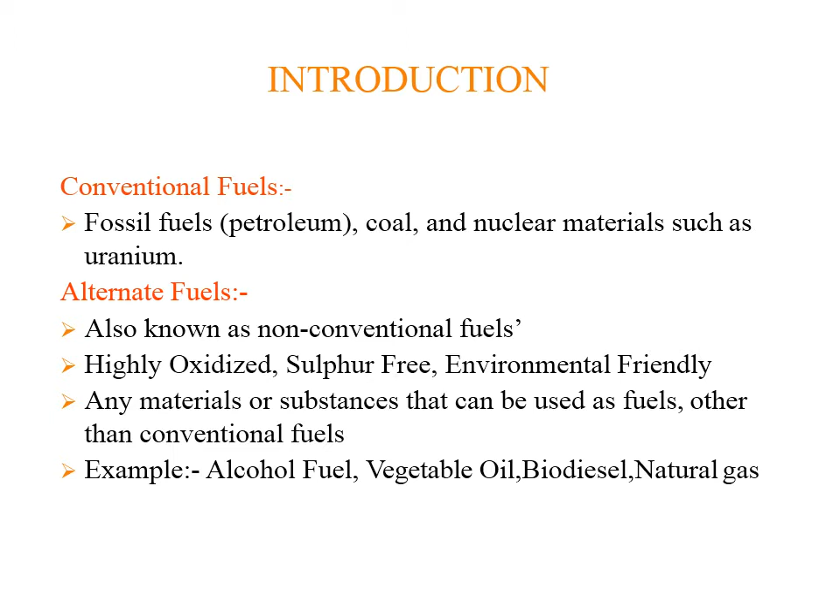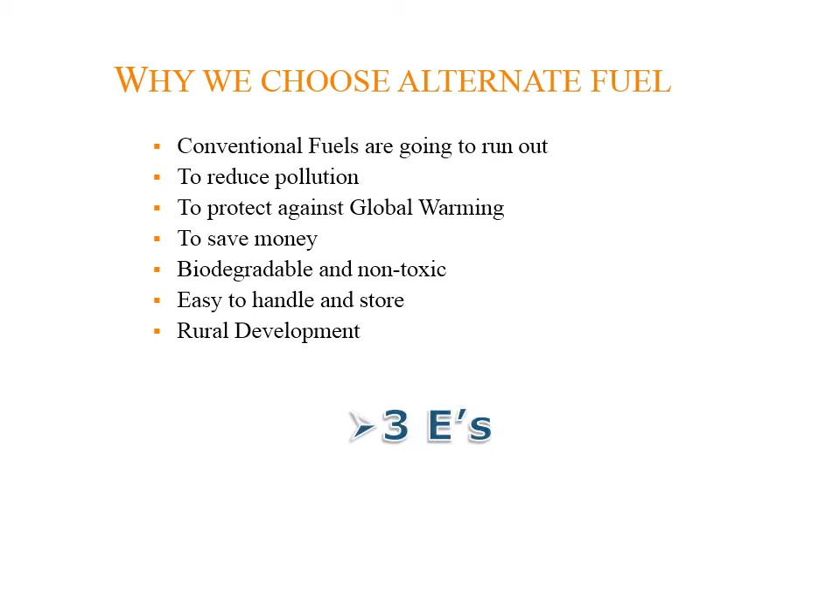So why do we choose alternate fuel? There are advantages. Conventional fuels are going to run out, already depleting day by day. So in order to reduce pollution, reduce global warming, save money, they are biodegradable and non-toxic, easy to handle and store, and good for rural development. We can summarize the advantages as three E's: eco-friendly, efficient, and economical.

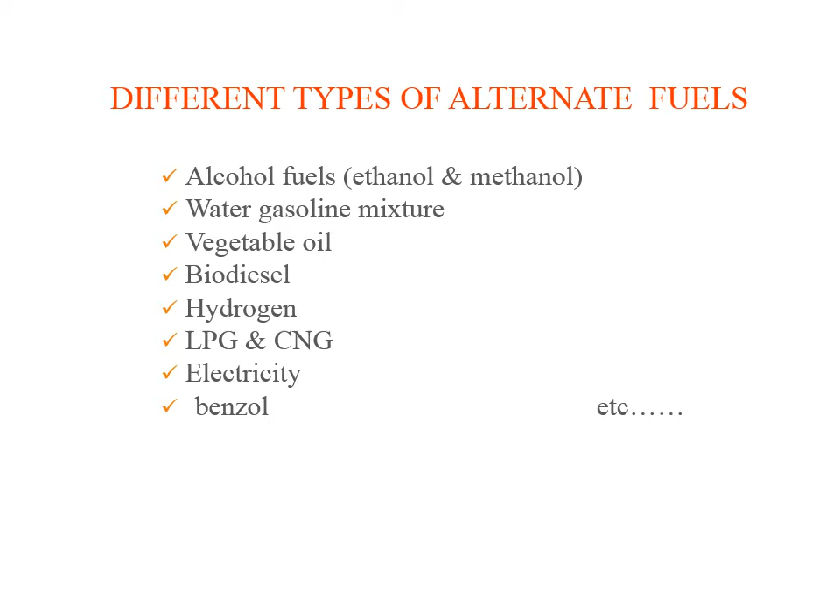So what are the different types of alternate fuels? Alternate fuels are majorly classified as alcohol fuels, water-gasoline mixture, vegetable oil, biodiesel, hydrogen, LPG and CNG, electricity, and benzol.

Ethanol is alternate, also called ethyl alcohol. We can obtain ethanol from corn, sugarcane, or grasses. Using ethanol can reduce oil dependence and greenhouse gases.

Ethanol is also used in some drinks like beer, wine, rum, and vodka, where they use ethanol.

Ethanol is produced by fermenting and distilling starch, crops, or cellulose. As we've seen in biodiesel, there is also fermentation and distillation process here to produce ethanol.

Ethanol is most commonly used to increase the octane number. Octane and cetane are numbers given to fuels to indicate the calorific value and quality of the fuel. I will discuss octane and cetane numbers briefly in upcoming lectures.

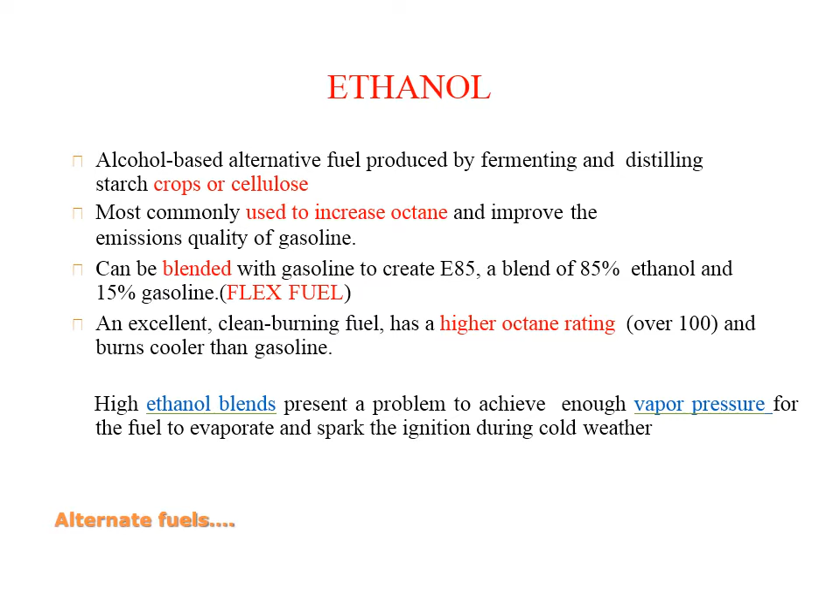We can blend ethanol with gasoline fuels to obtain a higher octane number and higher efficiency. In cold weather conditions, we can also blend lower ethanol levels to avoid initial starting trouble, or to easily evaporate the fuel and get a spark in the engine cylinder.

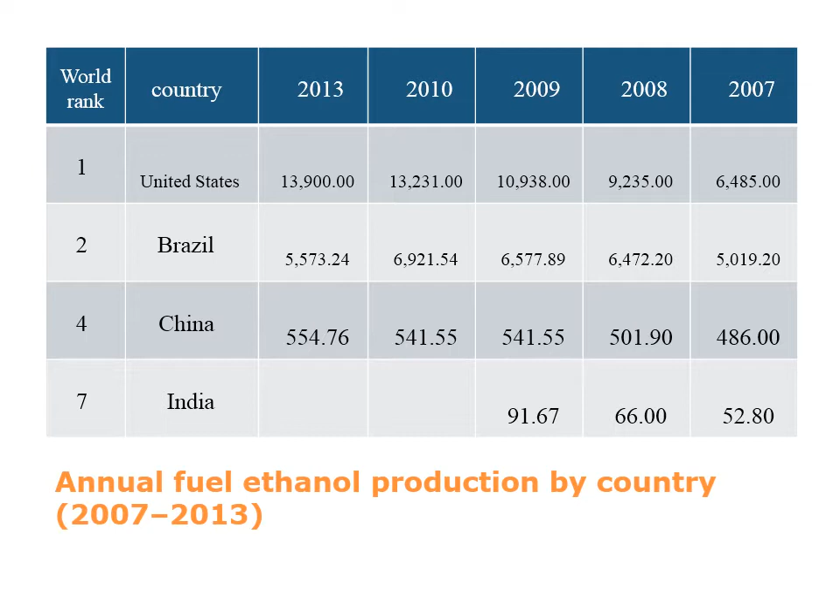Here the data is given up to 2013, showing how countries have been increasing ethanol production. The data is only up to 2013.

Alcohol fuel is classified into ethanol and methanol. We've seen about ethanol; now we are going to look at methanol. Methanol is also known as wood alcohol.

Methanol can be used as an alternate fuel in vehicles as M85. Methanol is extremely corrosive. We can easily convert methanol into hydrogen, which can be used for hydrogen fuel cells.

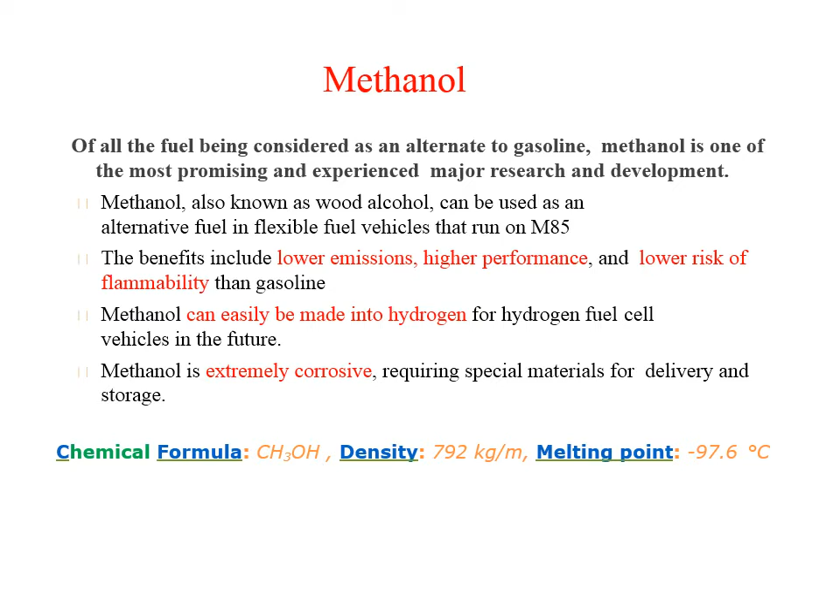Hydrogen fuel cells are used in upcoming generation technology like lithium-ion batteries. We store electricity in lithium-ion batteries for efficient storage and use it with a motor. Similarly, we store hydrogen in hydrogen fuel cells, which can be efficiently used to run a car or vehicle.

Next we are going to see about vegetable oil. Vegetable oil was used in the first diesel engine, designed by Rudolf Diesel. In 1984 he ran the engine using peanut oil.

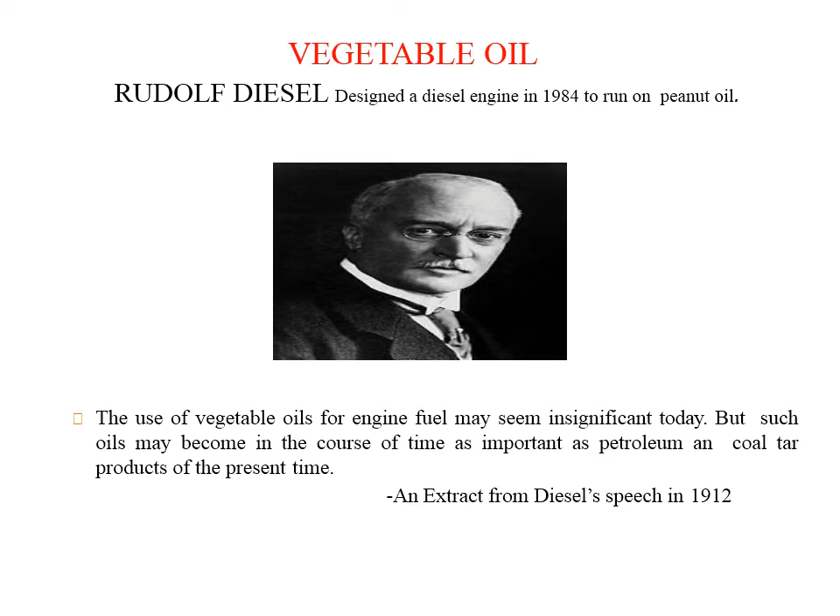He said in his speech that vegetable oil may be insignificant today, but it will be a promising oil when petrol and coal tar are depreciating at that time.

Most diesel cars are designed such that we can directly use vegetable oils. Pure plant oil (PPO) and straight plant oil (SPO) are designed so we can directly use them. Initially the engine may be started with diesel, then switch over to vegetable oil.

For complete combustion and complete atomization to take place, we have to preheat the vegetable oil in order to reduce its viscosity and surface tension. Viscosity and surface tension, I hope you have studied in fluid mechanics.

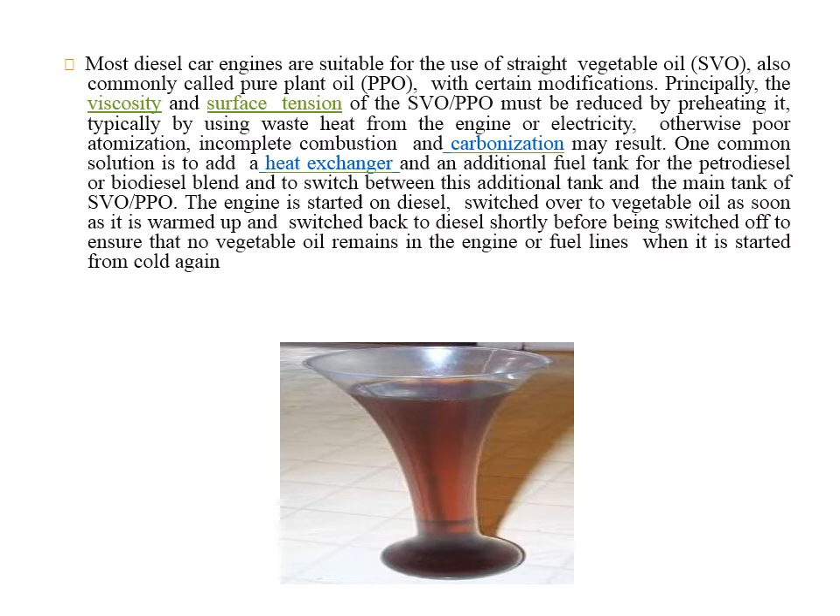We have discussed biodiesel many times. Biodiesel is produced from vegetable oil, animal fats, recycled restaurant grease. It is safe, biodegradable, and reduces pollutants. Biodiesel can also be used in pure form, but it may require certain engine modifications. Need to heat storage tanks in colder climates to prevent the fuel from gelling.

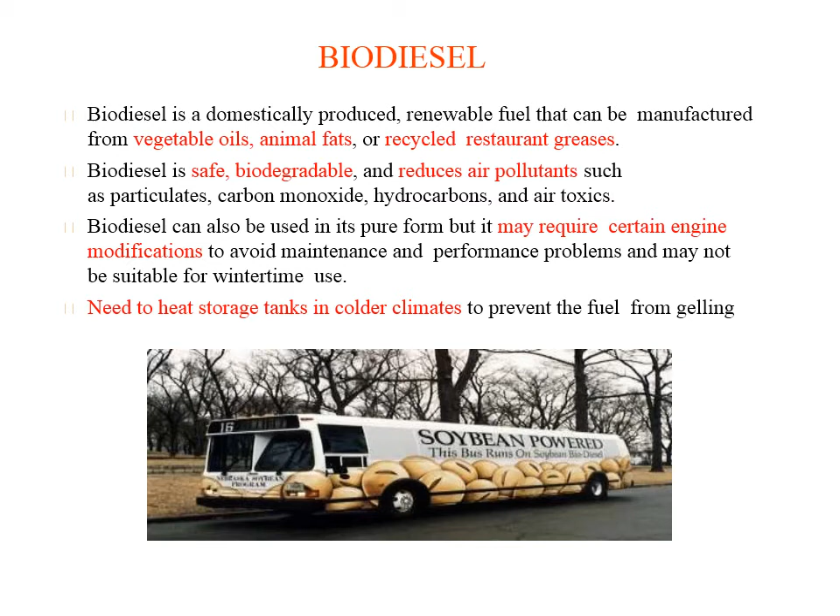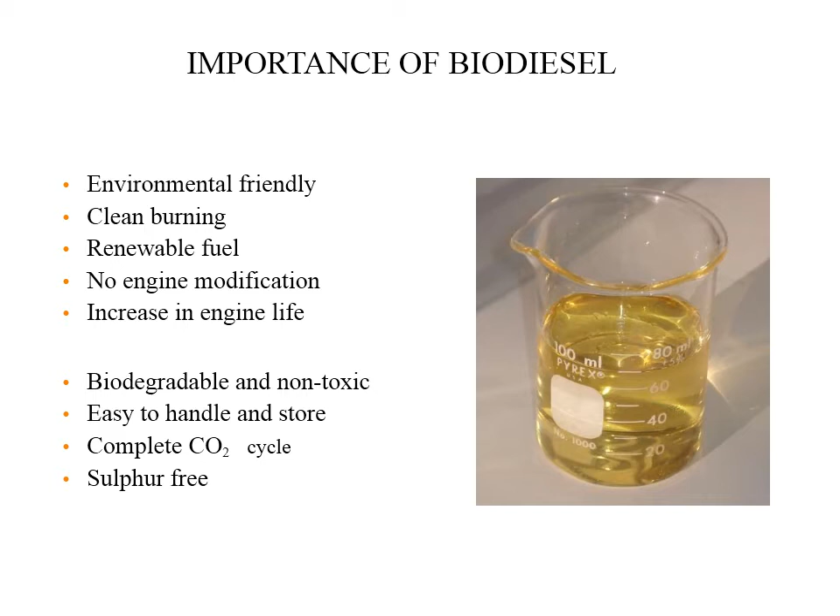These are some of the points for biodiesel which we have discussed already, and some of the importance of biodiesel. Yes, the complete CO2 cycle - we have already seen this cycle. The chemical formula for any oil or fatty acid.

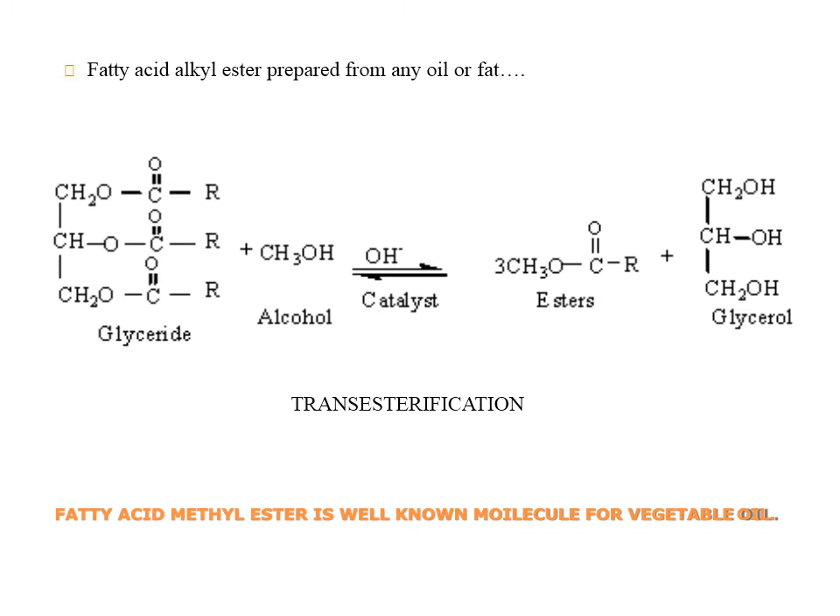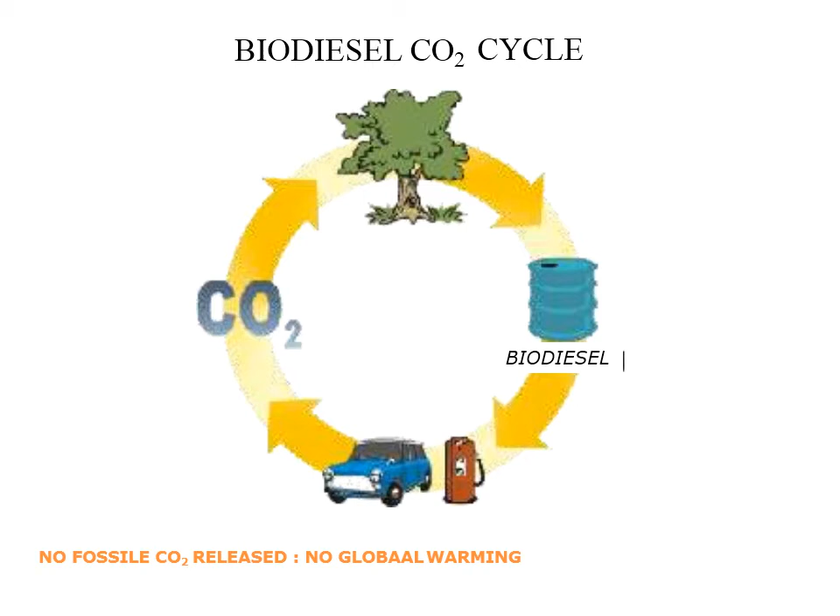If you remember these equations while writing your semester exam, it will be helpful for you to score more marks. We have seen this cycle so many times in our bioenergy unit. The plants are preparing the biodiesel. We are using it as fuel or to generate electricity. The pollution emitted as carbon dioxide goes back to the trees.

The other important alternate fuel is hydrogen, which is going to be the future in upcoming days. It does not occur free in nature in useful quantities - we cannot absorb hydrogen from the atmosphere, but we can manufacture it by other ways. One promising method to produce hydrogen is to extract it from water.

The chemical formula is H2O. We can easily separate hydrogen from water. The major disadvantage in this process is we cannot use salt water - we should use only pure water.

As you all know, our earth is surrounded by sea around 3 parts, and we have very less pure water for our drinking purpose. We can convert salt water into pure water and separate hydrogen from that water. It emits only water vapor. The byproduct of hydrogen when used for vehicles is only water vapor, assuming there is no leakage of hydrogen gas.

Storing hydrogen is very complicated. A small ignition leads to danger - storing hydrogen is very volatile and leads to danger. A small leakage in a hydrogen storage tank leads to a very big danger. It can store up to three times the energy of conventional natural gas. Hydrogen has more potential than natural gas, can be produced domestically, and is environment friendly.

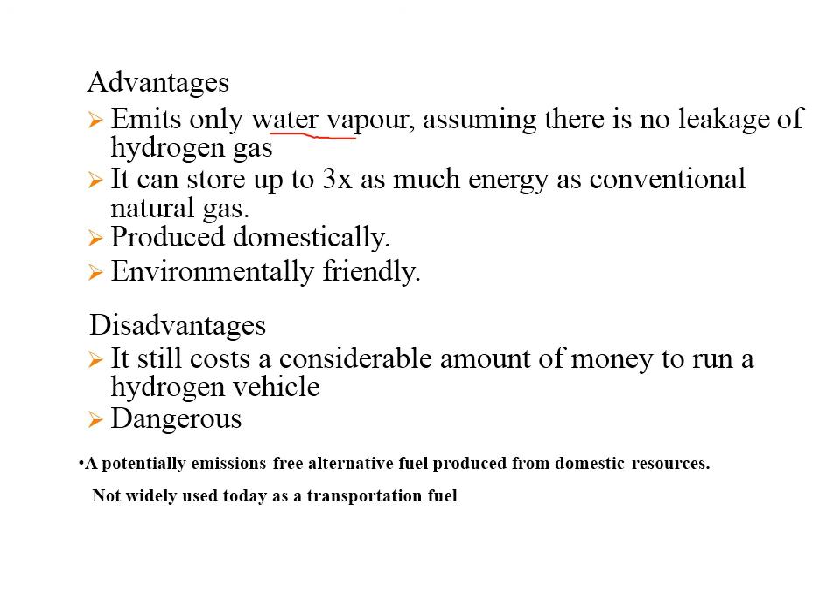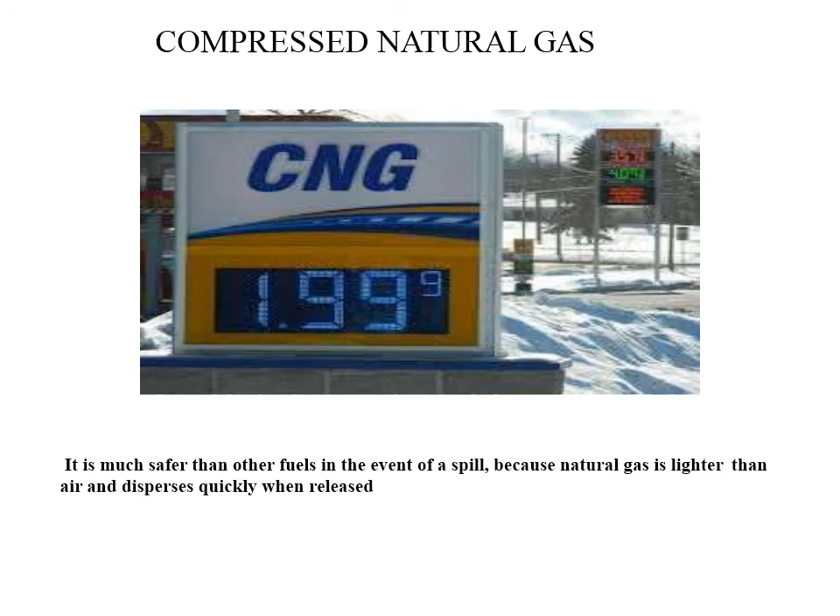Compressed gas is what we are using now in LPG and CNG. Liquid petroleum gas is used for our home purpose, and for vehicles we are using compressed natural gas. If there is any leakage in compressed natural gas, it will not be a big disaster, because it is lighter than air and easily mixes with air. Using compressed natural gas is much safer compared to hydrogen.

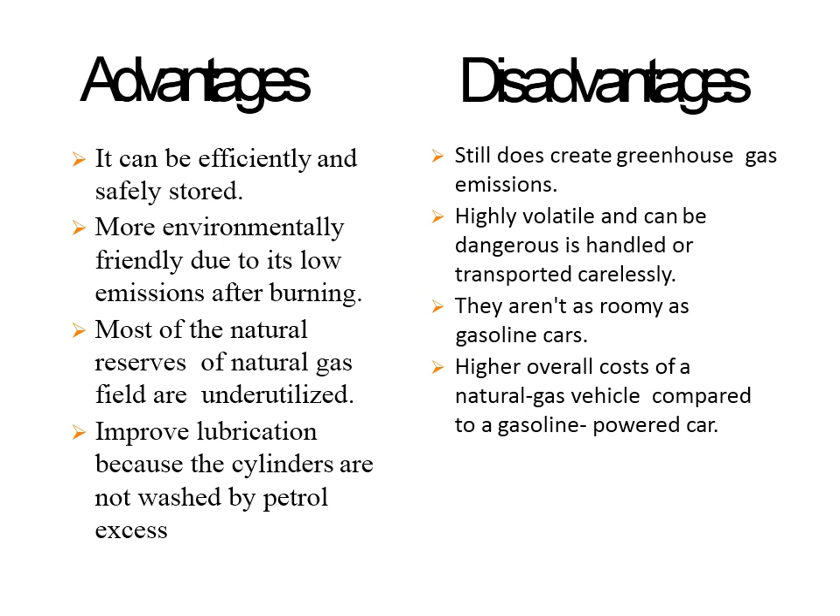I hope in this lecture I have covered some of the points related to alternate fuels - what are the alternate fuels and from where we are extracting them. With this topic, we have completed our third unit, bioenergy.